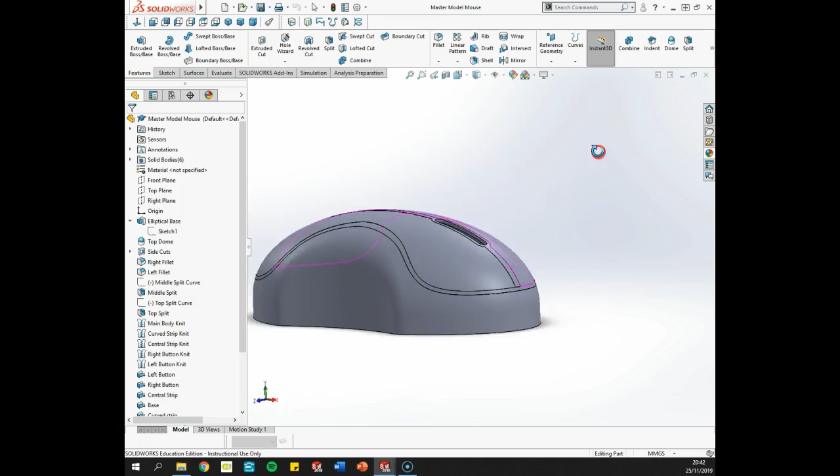So this is a solid body mouse. We use a bit of surfacing in it, which we'll get to later. One feature that I'm interested in here is using split lines or split curves to section it, to chop it up into sections, which is very, very handy.

And lastly, and probably most importantly, is the fact that we can create the whole model in one file here, including the wheel, which I haven't done here at the moment, everything in one file, and then we can export all the bodies, our solid bodies, out as individual part files. So you have to have a minimum of 5 for the project, and then you will reassemble them back together.

So the old way was to kind of do all the part files in individual files, which was a nightmare because you were going between files, getting sizes right, trying to get things to match up perfectly in terms of size or whatever. So this is a much better way of doing it.

So anyway, we'll go to the top plane. I'm going to draw an ellipse, center point on the origin, do a horizontal major axis, and then do your minor axis, and we'll set the following measurements there. And see, it's gone a bit wonky. I'm going to show you how to fix that.

In fact, what I'll do is straight away I'll take those 2 points there and I'll make them horizontally aligned, and then I'll do the major axis like so, make it 100, and the minor axis will make it 55, and it's fully defined. Exit the sketch, features, extruded boss base, and we'll do a 5mm thickness.

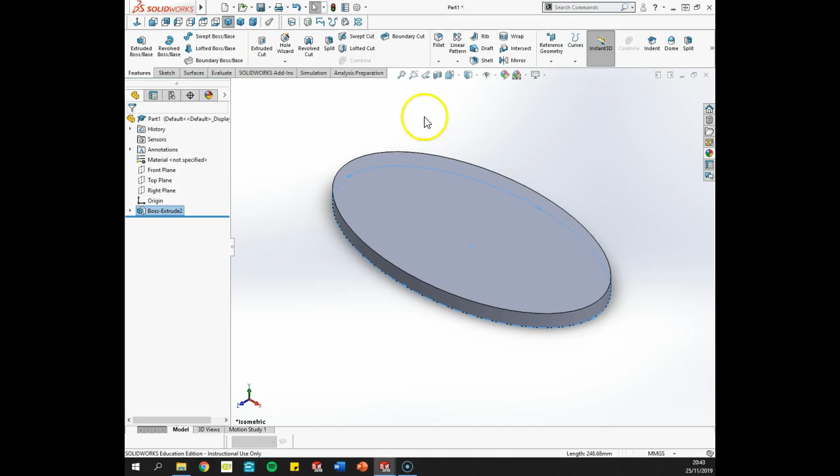Now, a new feature called dome. So we go to insert, features, and dome, and if we select the top surface there, it domes it. Make sure we have elliptical dome selected, it's a slightly better dome, and we go for a height of 25 and green tick. So elliptical dome, 25 high.

Now what we'll do is we'll do little cutouts on the side for the ergonomic finger grips, so top plane. And I'm going to do this in half and then mirror it over. Now I'm going to use a midpoint line here, which is not a construction line, but I can turn it to a construction line afterwards, so you can see the effect that the midpoint line has. Land your point on the circumference there, and select it and go for construction.

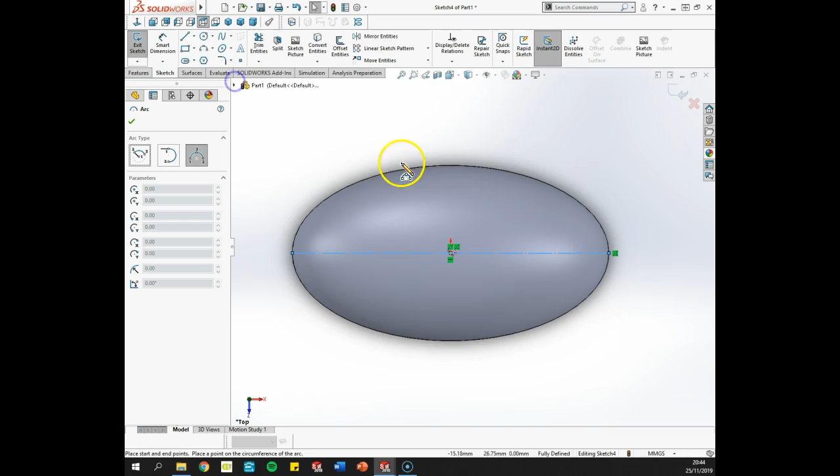Now I will do a 3-point arc, and I land my first point on the circumference, second point on the circumference, and the center point there. Now what I want to do here is put a smart dimension on it from this point to the origin, make it 25, and the same for the other one, and it should go fully defined or black. 25.

Maybe that center point there needs to be vertically aligned. Still hasn't quite gone black yet. Let me see what's going on here. What did I do wrong? Hold on, let me just delete that again. Get rid of them all, try that again. So 3-point arc. This worked for me flawlessly earlier.

Bit of curvature. Oh yeah, I was to do the radius, that's what I forgot. Sorry, I'll do the radius first. Radius 70. From there to there, 25. From there to there, 25 as well. And it should go fully black.

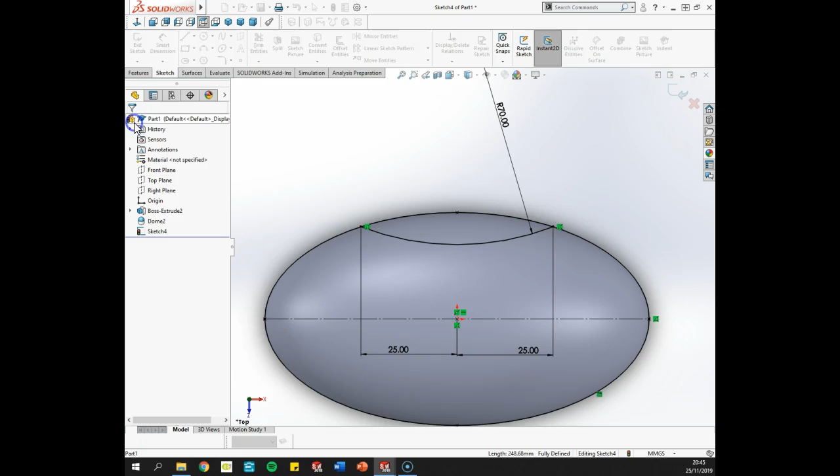Yep, there it is. Now I need to close off this curve because I'm going to use it as a cutout. So I'm going to go to convert entities, select the circumference of the ellipse, green tick, and trim entities, and trim off the bits we don't need, so you can barely see them disappearing there. And I'm left with that kind of shape there. And what I want to do then is mirror that. So just mirror that about the center line, green tick, and exit the sketch.

Now we're going to go features, extruded cut, select sketch 4. Now it's going the opposite way, so I want it to go up and I want it to go through all rather than a distance. So it'll cut through any material in its place. Right, there's the body. Now we should be renaming these. I'm not going to waste time by renaming these here, but rename them accordingly.

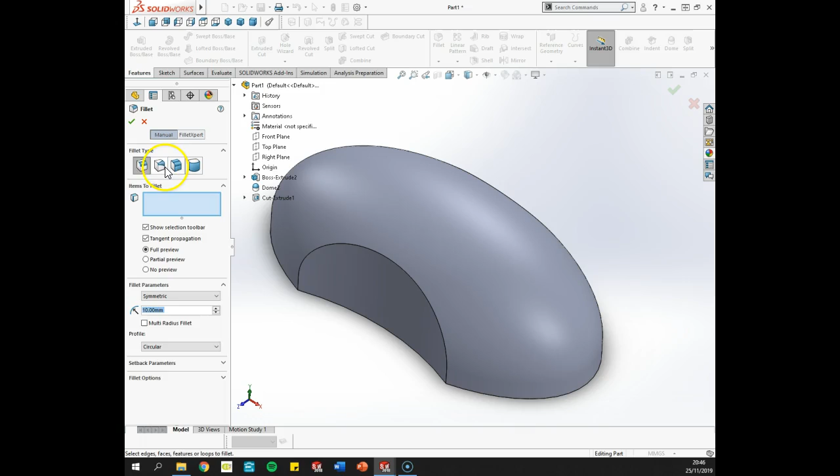We go to fillet, and we're going to introduce a new fillet here called a variable fillet, which means we can vary the fillet along a line. So I'm going to select the line, or curve in this case, and you can see that I have 3 extra pink dots. I have the start and end, so I have to activate all the dots first before I can use them.

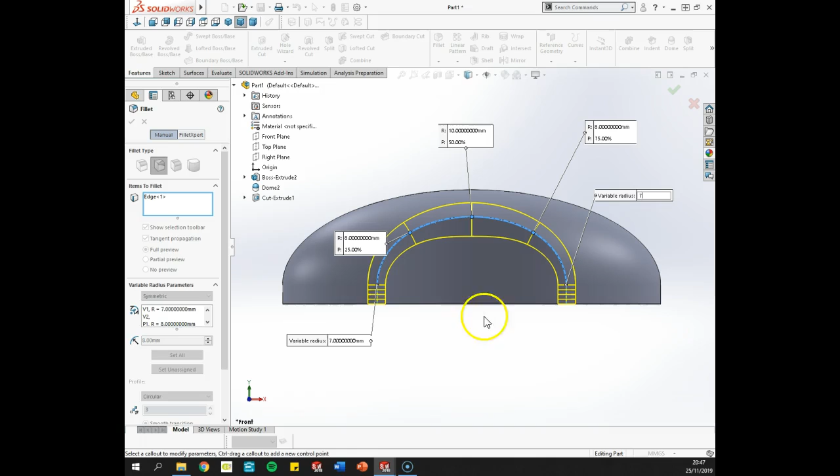And I'll just go to a front profile there. So this one here, I want this to be 7. The next one up, I want to be 8. I want it to peak at 10 in the middle. So you have to click into the box. This one here I want to be 8, so we're kind of being symmetric about it. Like so. So 7, 8, 10, 8, 7. That's grand. Green tick. And you can see there it's a much more ergonomic effect.

Now I have to do the same over the far side. I can't actually mirror that, but that's fine. Select the line, variable fillet, activate the pink dots. So our first one is 7. Next one is 8. Middle one is 10. 8. And 7. Green tick. And that's that there.

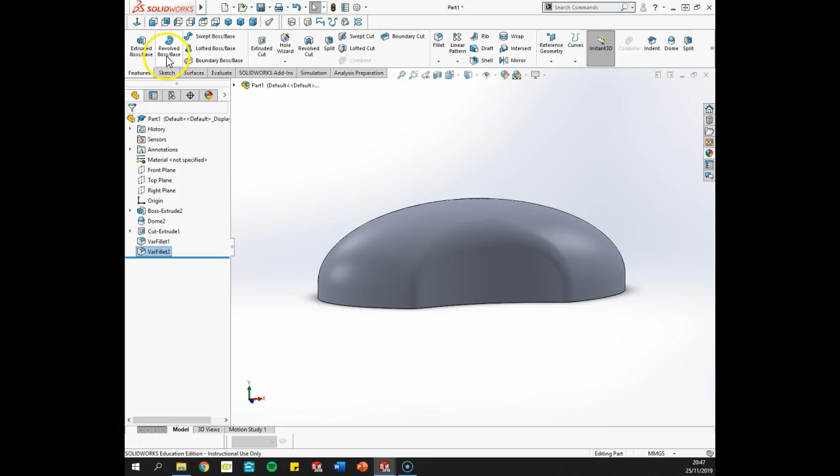Okay, the next thing that I want to do, if I just go back to my model, so after that's the fillet. Yeah, so we're going to do the split curve now. So we're going to split it kind of across the middle. So I'll go to a front view, I'll select the front plane. Once again, I'm going to do a mirror. I'm going to mirror a curve from one side to the other, so I need a center line or axis of symmetry for that. Make sure that that line is vertical. Doesn't look vertical, it is vertical.

Okay, so I'm going to start off with a spline. Now I want to clear the top of the fillets here. So what I'm going to do here is go to view, display, and I don't want tangent edges removed. I want them visible so I can kind of see what I have to work with there. Now my first point, I'm just going to start here. First point, second point, and my third point will be on the axis of symmetry just above that tangent line.

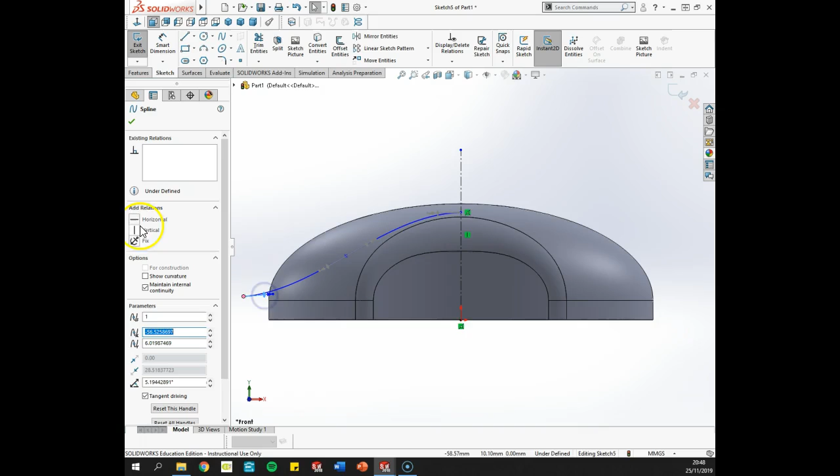Okay, now this one here, grab the spline handle, make it horizontal. I have to give it another move again, horizontal. This one here, because it's on an axis of symmetry, I want it to transition over perfectly, so we want to make it horizontal, so it goes perpendicular in effect to the line of symmetry there. And do I need to mess around with this anymore? So you're just going to approximate. I'm not going to put any measurements on this. We'll just kind of go with that.

Now what I'll do is offset entities. So offset basically means I can create the same profile but at a distance away. So that's the profile. There it is down there. I'm going to reverse it and I'm going to go 1.5 mil. And I typed something wrong there. 1.5. There we go. Maybe I'll go with 1 mil so I can go back and change that. Just brings it a little bit closer.

Okay. Then what I'll do is mirror those two. Mirror it about my center line like so. Green tick. Now I would go back at the end and I would fully define them once the model is completed and I'm happy with everything. Right, so the next thing we'll do is we're going to use that curve, those two curves in effect, to split the whole thing in the middle into 3 parts.

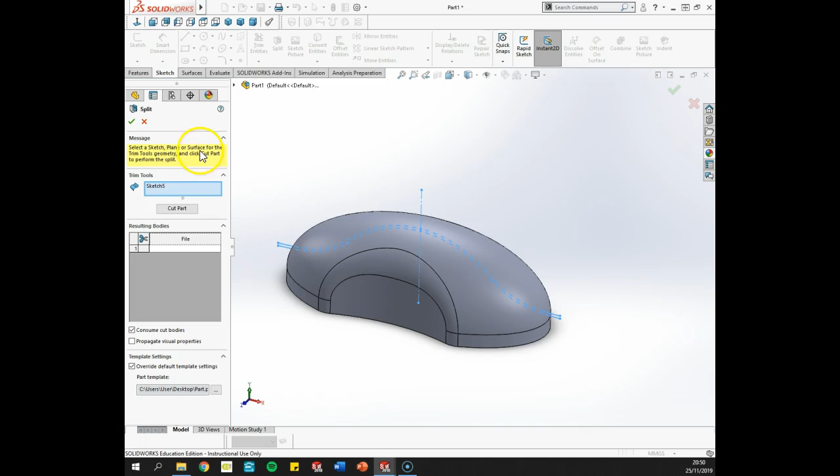So we go insert, features, and we go to split. Now the curve is already selected as you can see, so there we are, sketch 5. And we want to cut the part, and it should leave 3 resulting parts. A top part, that little skinny part there, and the bottom part. Okay, select all 3 of them. Do not go consume cut bodies, that consume makes them disappear, so untick that, and green tick.

In my solid bodies folder now I have 3 bodies. I have the top part, that skinny wavy curvy part, and then the kind of base. Okay, so it's split. Now I'm going to hide that sketch. I don't need to see it anymore. We're done with that. I'll go to the top plane now. So we're going to do a cut or a split for the cavity for the mouse wheel to go into.

So top plane, I'll go with the midpoint line again. Make it as long as you want, doesn't matter. I'm going to turn it to a construction line though, which is very important. Now we'll use a new feature called a slot. A slot is basically 2 semicircles at one end with a straight part in the middle. So I'll select the first one.

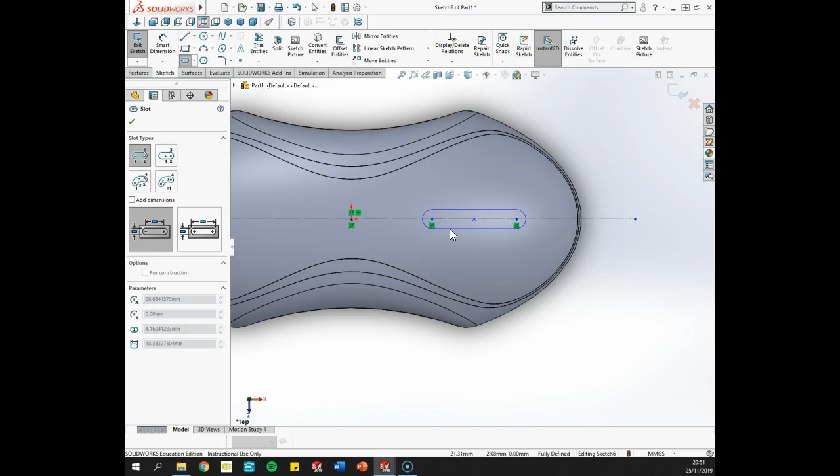And I'll have to turn it off. And we land our first semicircle center there, second semicircle there. And we draw it like so.

And we need to put some measurements on it. So I think the radius of that is 1.5. I think the distance from the origin to that one is 19. And then the distance from the origin to the far center point was 35.

Like so. Now what I need to do is create a kind of a straight bit. So I'm going to, and it doesn't matter if I'm outside the sketch here or outside the model. So just one big long horizontal line like so. Need to make sure it's horizontal, and I'm going to mirror that down.

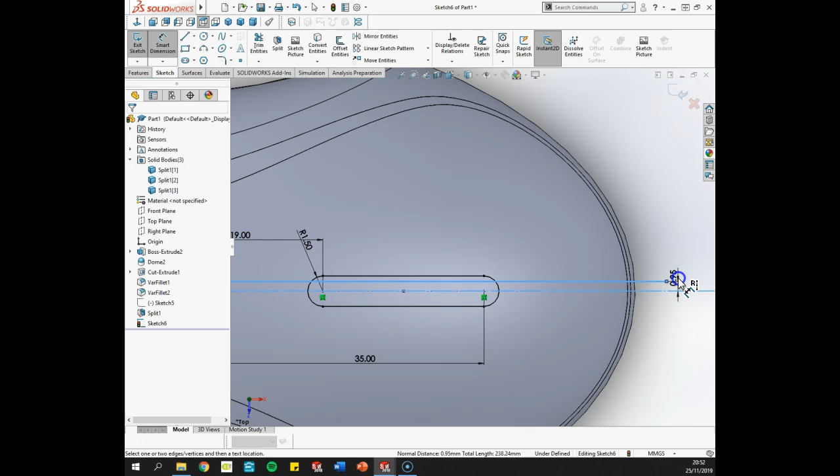No, I'll put a smart dimension on it first. So that center line, make it 1, and I will mirror that about the center line like so.

We're going to be doing a bit of trimming now in a minute, but just hold your horses for a second. Now what we'll do is we'll offset that slot there. So offset entities at a distance of, oh god, what was it? I think it was 1, like so.

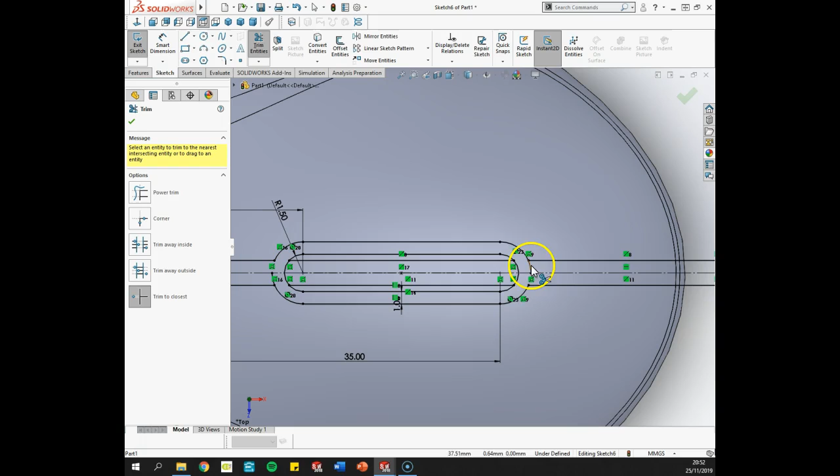Now I need to do a bit of trimming here, so bear with me. Trim entities, so we need to get rid of that there, that there, that there, there, even this little point part in here. It'll all make sense at the end. That bit in there, that bit in there.

Like so. And as I said before, it doesn't matter that the sketch kind of goes outside the model. You'll see why in a minute.

So we could put a bit of work into making it fully defined. So one thing I can do there, if I can not click the 1, that'd be great. Hold that and that point and make them vertical.

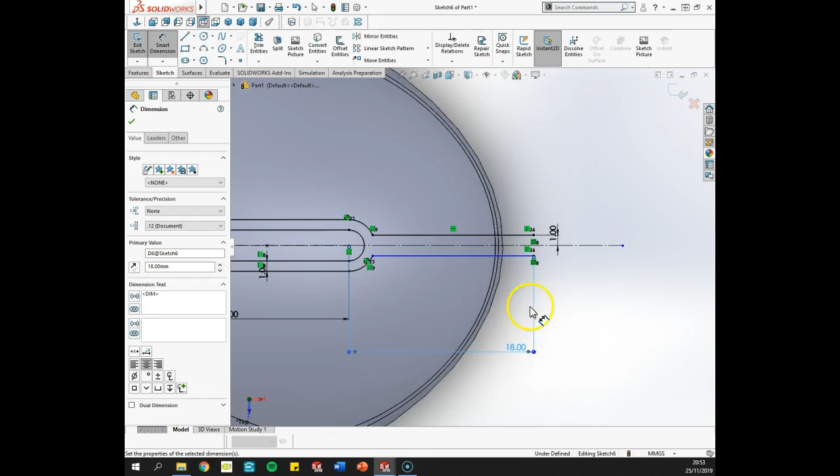If you wanted to put a dimension on it to satisfy yourself, you could just do that there. We'll just make it 18. Make that 16. We have to make sure that that's horizontal.

Okay, so it's got a problem there, so I mightn't push my luck. I'll just leave that as it is. It's probably no harm to just leave it like that. That's the kind of profile I want, so we'll just go with them dimensions for now.

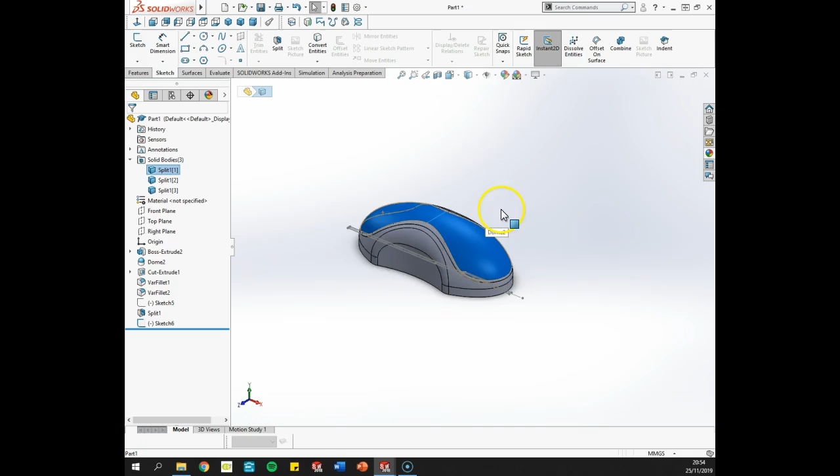So end my sketch. Now I'm going to use the split again, so it's going to split it from the top down, but I'm not going to split it through that body there, which would be that and that one there. I'm actually just going to select that one, so it's just going to split the top one, which is handy, so I can isolate that top section to be split, which is really what's going on with the mouse, the cavity for the wheel anyway.

So we go insert features split, and I'll select the sketch, selected bodies now, and I'm going to select the top. I couldn't do that last time because I only had, with my first split, I only had 1 body, so I had no choice but to select 1. Okay, but because this is 3 bodies now, I have the option of selecting bodies.

So we want to go cut, and we get 4 resulting parts. Select them, consume cut bodies. So let's have a look at our 4 parts. The left button, the right button, this bit down the center, and we have this thing here.

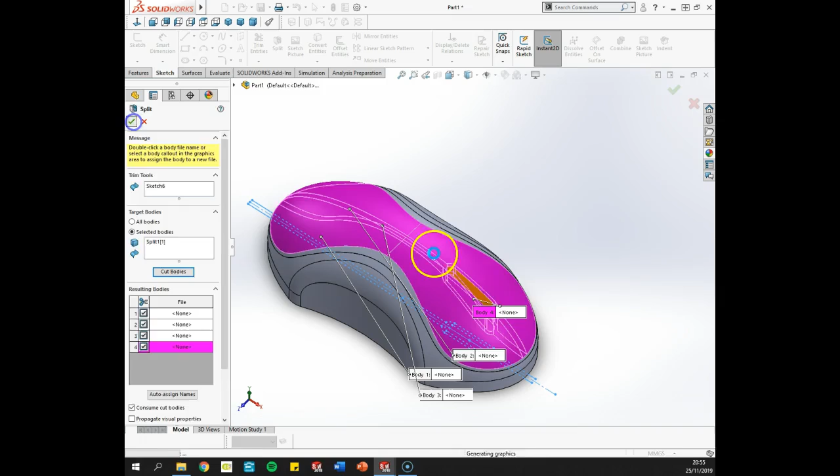Now this one we're going to be getting rid of later. We're going to delete that because that has to go. You'll see that there's solid material there left behind. Now I probably didn't untick consume cut bodies there, that's why they disappeared. Yeah, look at that.

There we are. Now we've got more bodies in our folder. I'm looking for that one there, and I'm going to right click on it and go delete keep body. Delete. Now that's gone, and that comes up as a move in your design tree.

Okay, so let's just kind of review what we have there. We have this kind of central strip there. If I right click it and go isolate, that's what it looks like. This is going to be important.

We're going to keep this one for later because we're going to be able to drill a hole there for the axle for the mouse wheel. It's going to be handy.

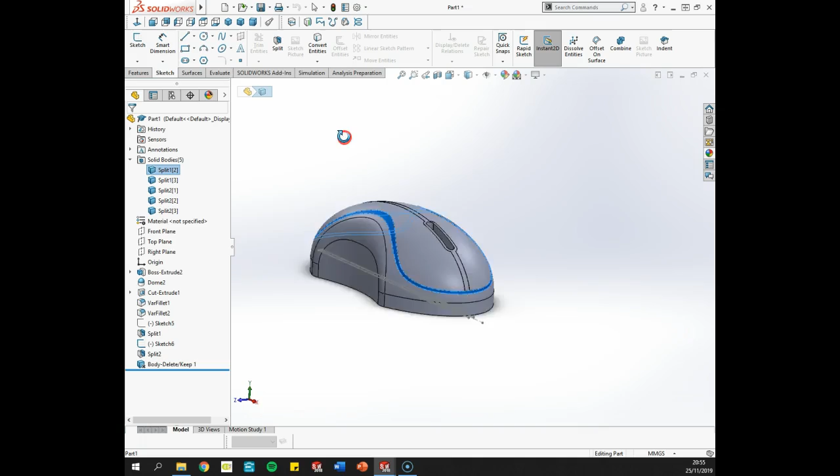Okay, so that's important. Our next ones are the left mouse button, right mouse button, the base, and this one here, which I'll isolate to show you what we're left with. Remember, the curve cut through the object earlier on, so it's split, and this is what we were left with. We're not actually going to be using this. In fact, we're going to be using none of these here. This will be none of the final mouse except for this part here.

This is going to be underneath. We're going to be adding layers onto it, so think about this like a skeleton, and what we're going to do is add the flesh onto it. So this is our skeleton, and none of these will be used. It's just what's underneath all the plastic we're going to create.

So we're going to use some surfaces now. Make sure your surfaces toolbar is open. If it's not, right click and make sure surfaces is ticked. What we're going to do is knit all the main surfaces. They look like surfaces at the moment, but they're not, they're faces. Faces and surfaces are different. So I'm going to knit that one.

Green tick, knit the other one, green tick. Sorry, I have two, just make sure you don't have two things there. It took the last surface knit and tried to knit it again, I don't know why it does that, it's like a default thing. Green tick, that middle thing. Look, it's doing it again. Just delete that one there and select the one that's appropriate.

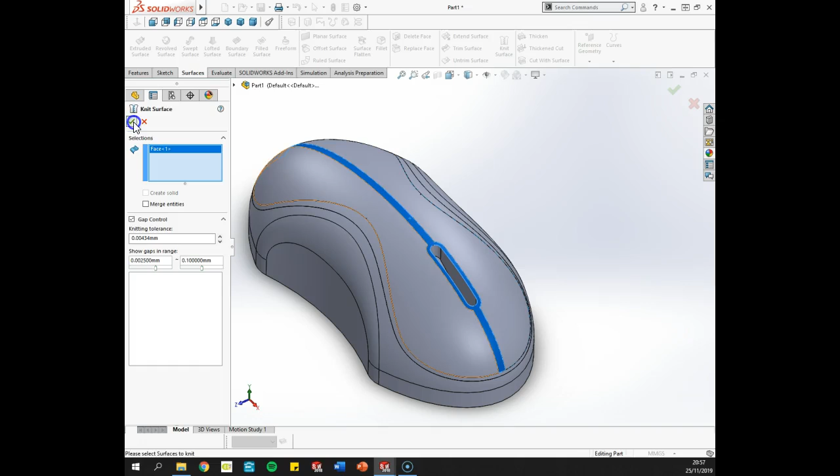Now the last one we're going to do, sorry, this one here as well, this curvy thing. And now the last one we're going to do is the base. So now what we need to do is select multiple faces here, hold control on the keyboard and go around and select all these other ones. We're going to combine all these together and the one underneath to make one surface.

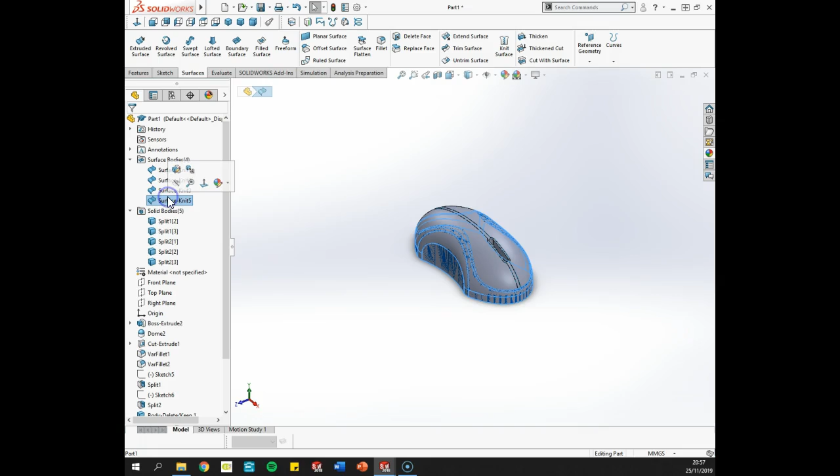Okay, so now I have a surface bodies folder and you can see all the surfaces there. It doesn't look as if much has changed, but it actually has. So the central strip, left button, right button, base, and I thought maybe I included that one there.

So my surface knit, I think I selected an extra one by accident. Or did I? Yeah, I think I selected that one there by accident in the last one, because it was in the box. When I clicked knit surface, it was already in there, I didn't delete it. Right, grand.

Now what we're going to do with all of them is thicken them. So thicken, now I want to thicken it outwards in that direction, not inwards, 1 millimeter, do not merge result for any of these. Thicken, the other button, unmerge, 1 millimeter.

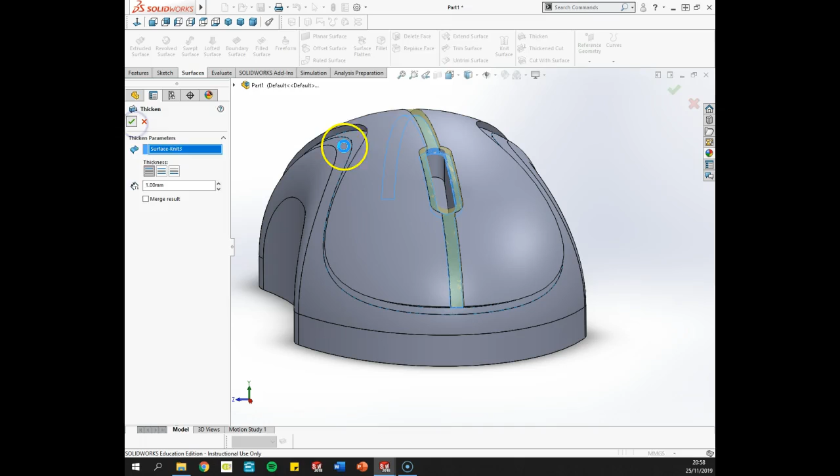That one done, so look what's happening there, we're adding thickness to it. So these are the actual bits that we're going to use, these thickened parts, not the parts underneath it. Click that one there, unmerge. Now the weird curvy part, which is there. And now the base, unmerge.

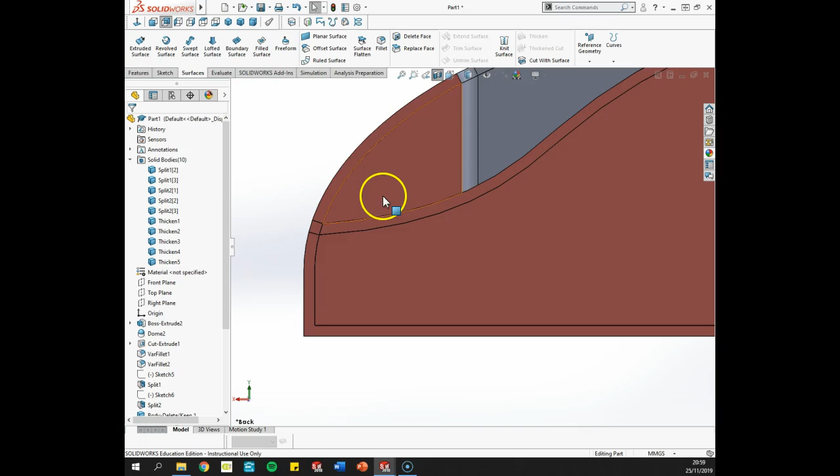Right, so it doesn't look as if much has changed, but it actually has. I'm going to go to a section view here, and use that plane there. Let's just look at it. You can see this is what I've added on, this is the skeleton underneath. This is what I've added on, this was the skeleton underneath. That's what I added on, skeleton underneath, that's what I added on. Okay, so we've just added thickness to everything.

So what I can do here now is I'm pretty much finished with the skeleton, so I can delete the parts I don't need. This is very important as well, I'm going to rename everything. So I'll call this base thicken, and this will update in the solid bodies folder, as you can see there. This is critically important because it's going to give the file names to your parts. I'm just going to call this curve thicken.

This one I'll call center strip or central strip thicken, and that's my left button thicken, and right button thicken, right button thicken.

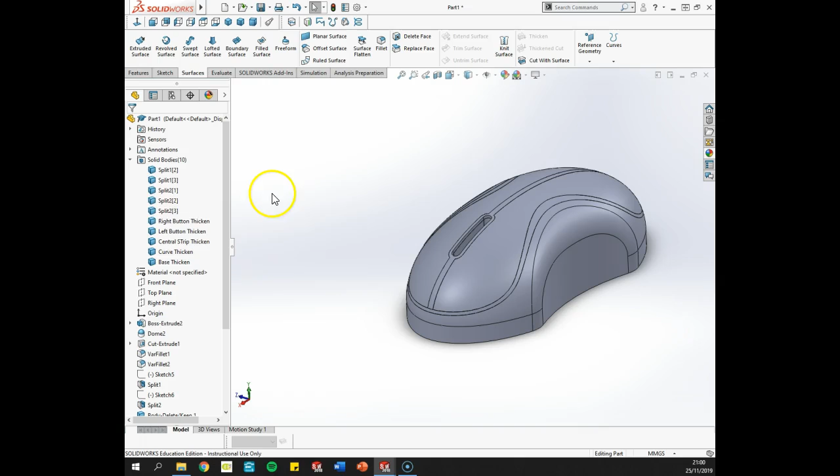And they're all renamed there. Now, there was one part that we needed, and that's this yoke here, this thing here. We'll call this the wheel mount.

So the ones that are named properly there, they're all our parts that we're going to need. I'm going to delete all these ones, I don't need them anymore. Do you have to delete them? No, you don't have to delete them, I just want to be tidy about things. I don't need them anymore, so get rid of them. Delete. And one more. Delete.

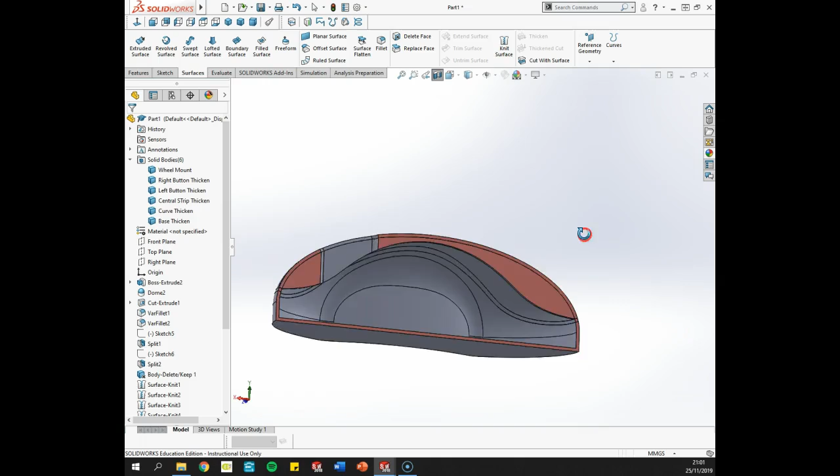So this is the skeleton gone. Now, let's go back to that section view and see what's left. So now you can see that it's hollow. I've gotten rid of the skeleton underneath. It's hollow, it's more realistic of a mouse. Components can fit in here, etc.

Grand. Now our next move would be to, so we could probably do the wheel in here. We might as well, so we'll do the wheel. What I need to do is turn this to hidden detail visible.

Like so. What I want to do, in fact, that wheel mount, I'm going to isolate that. And what I want to do is drill a hole in here somewhere.

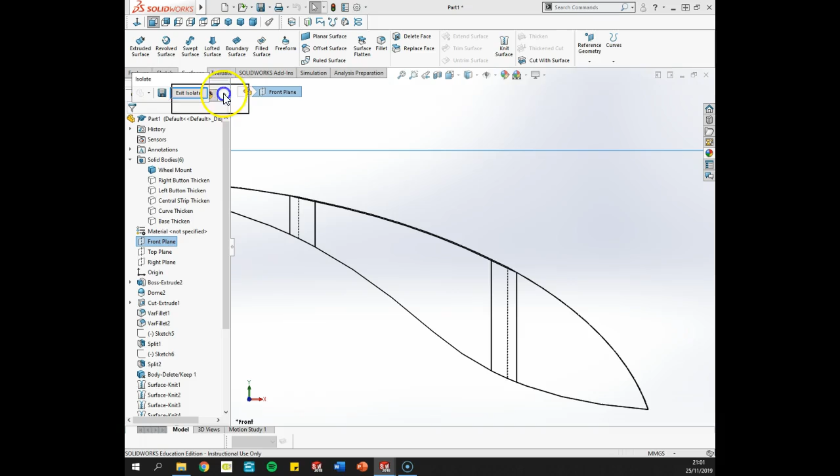So I'm going to select the front plane, get rid of that there, sketch. I'm going to do a center line from the middle there to the middle there, and I'm going to do a circle on the midpoint of that line, and make it diameter 1.5. Okay, so that looks fairly central there.

Now what I'll do is I will extrude cut that, not extrude it, that's different - I will extrude cut that. And I will do it bidirectional, that means midplane. Like so. So we've now drilled a hole for the axle.

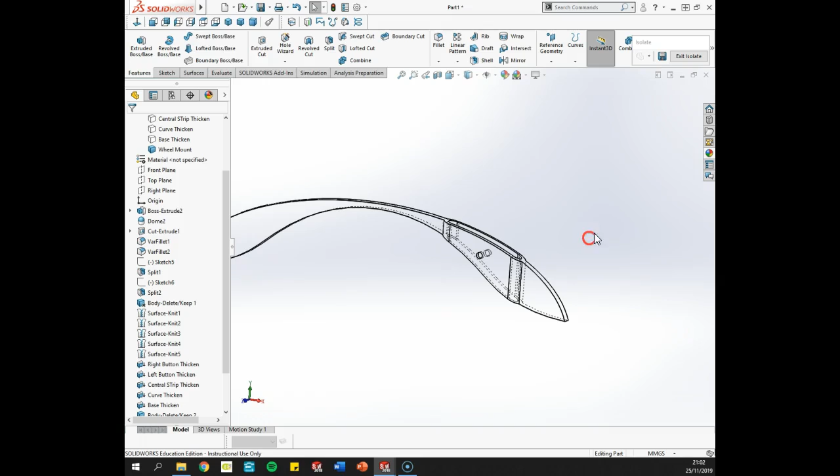Next thing I will do is create the axle itself. So I'll go circle, we need to get the front plane here. I'll just start that again. Front plane, circle, and we're going to locate that center point, and do it the exact same size as that one there. Okay.

And what I want to do here is a boss extrude of the sketch, and we want to go midplane. Just let me think about this one now. Actually, we're going to use two directions here because I wanted to come up and be flush with this outer surface here.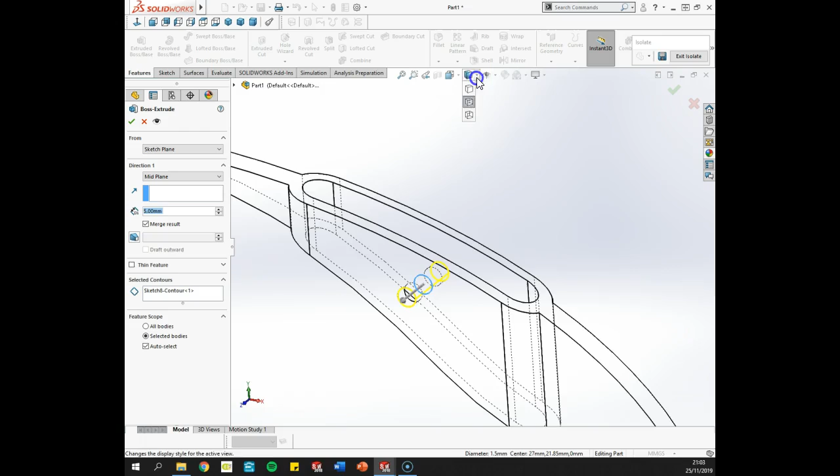So I'm just going to go back into this view here. So we won't go midplane, we'll go up the surface. I'll select that surface, but I want to go in direction 2, tick the box up the surface. Like so, so it'll always meet those two surfaces, no matter how far apart them surfaces are. Green tick, there's our axle.

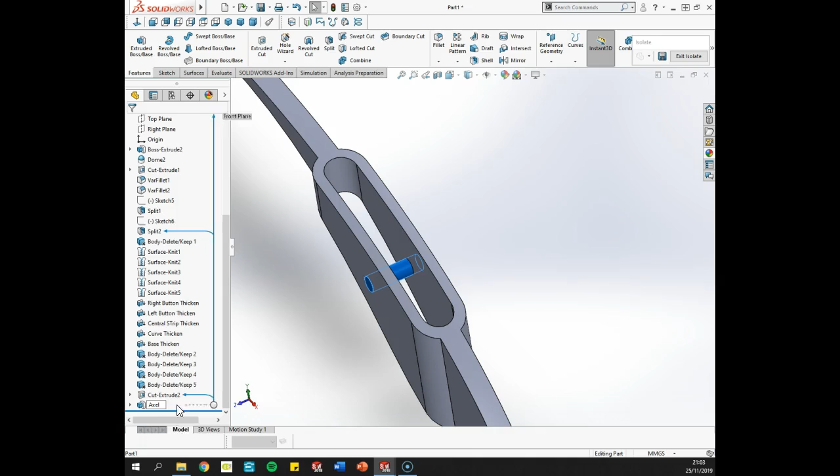Now one problem, I merged result - I want this to be a part. So, unmerge result. Now you can see that this is a part in the solid bodies folder, and I'm going to call that axle. I think that's how you spell axle, or is it L-E? Oh, I don't know, whatever. So now that's in my solid bodies folder.

Lastly, I'm going to create the wheel. So front view again, I'll go back to the hidden detail visible. So we're going to sketch a circle. Once again, I forgot to select the front plane. Circle, okay, the center point.

Now this is handy because I can approximate - I can see how much clearance I have. I'll probably go as far as there. And I'll make this 15.5. Like so, so that's the circle there.

And what I want to do is extrude that now. Why can't I see that circle? Because I'm in hidden detail visible. Where am I? Okay, so I'm going to extrude boss base.

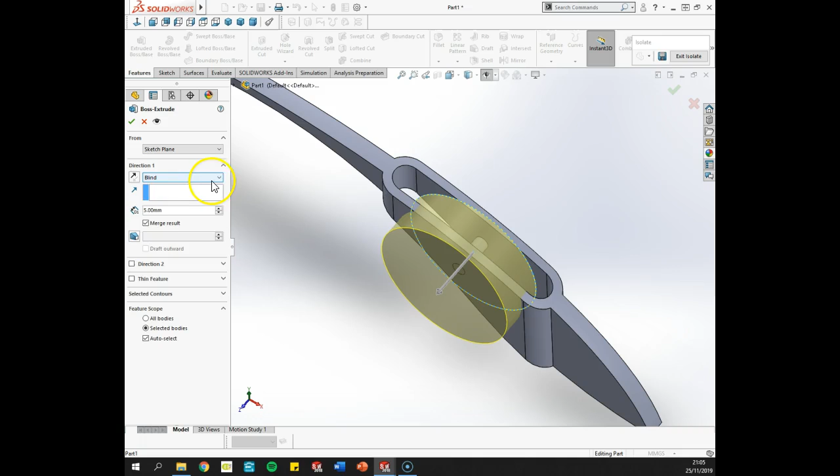We're going to do something similar again, we're going to go up the surface, so I'm going to get it flush with that surface there. Open up and unmerge result as well. Direction 2, up the surface, so it goes up to it but doesn't go over it. Green tick. So now there's my mouse wheel.

I'm going to put a fillet on that and make it look a bit more real. So we'll go fully round fillet, which is the last one. Select the first one, right click, select second one, right click, and then the third one, right click.

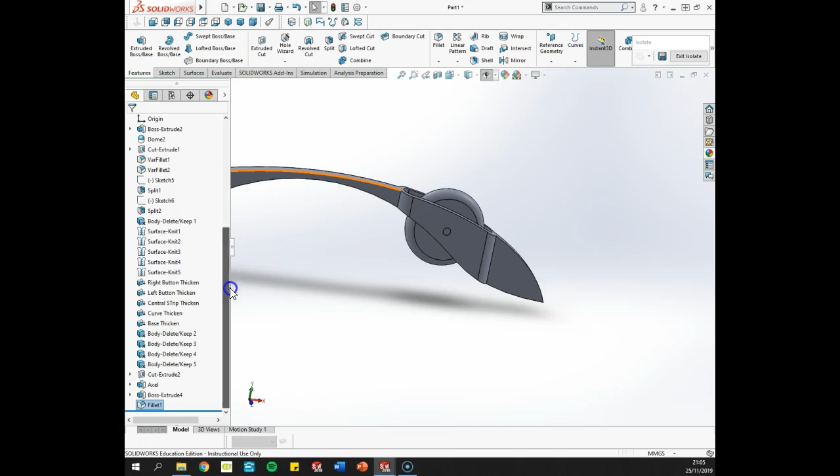Okay, so there's a mouse wheel. Last thing I'll do, I'll just make sure that that's a solid body in itself. Yeah, it's called fillet 1 because the fillet was the last thing that I done to that body. I won't call it mouse wheel yet because I'm going to make one more change to it. Right, let's go to front plane.

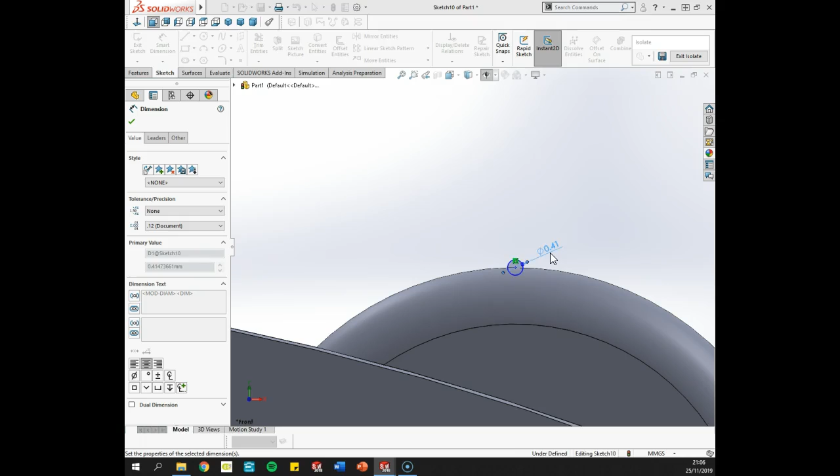Look normal to it, sketch, and what I want to do is a wee circle just up here at the very top, and it's going to be a tiny circle, and I hope I get this right now. Do I put a dimension on it? Yeah, sure, why not? So 0.25. So this is going to represent the grip, the ergonomic grip that you might have on a mouse. We can always go back and change it.

I don't know why it keeps disappearing. I think it's because of that there. Yeah, there we are. We're going to cut that out. Yeah, I'll cut it first. So extruded cut, select it, and we need to go mid plane, like so, so you can see the grip there. Now how could I make it deeper? I could go back and change the diameter of it to make it deeper. I'll just go with that for now.

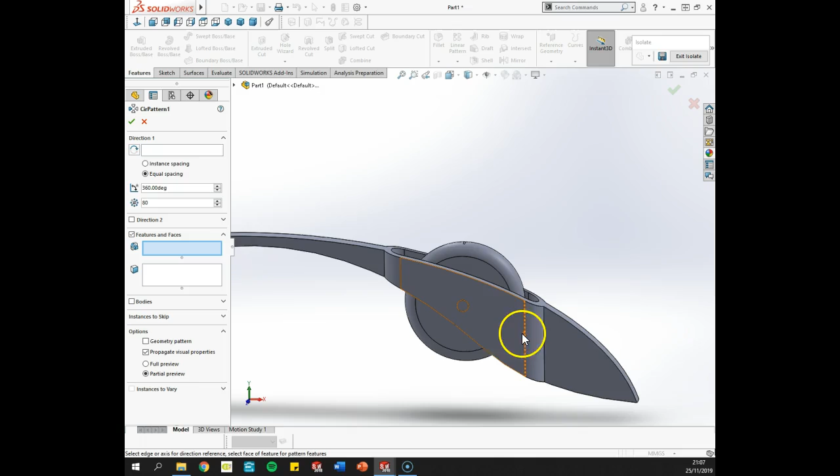So obviously I don't have to do that a load of times, so we can use our circular pattern. Now I think for circular pattern we might need to have an axis turned on, so we go in here and view temporary axis, so you can see there's one in the center there. Circular pattern. The object we want the circular pattern is, I'm going to go to the pull down menu, it's this little cut extrude here. This one here is the pattern axis. That's that one there. You can see what's happening. That's great, exactly what I want.

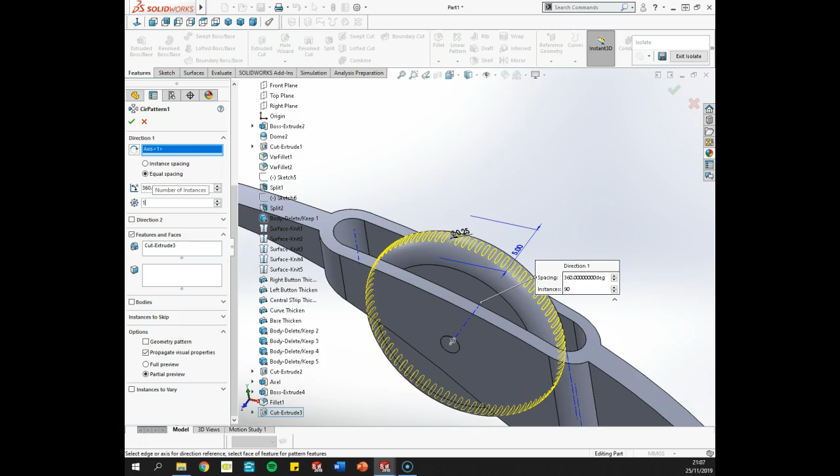Now this tells me it does it in a 360-degree rotation, equal spacing, and there's 80 of them. Let's increase it to 90 and see what happens. Sure, let's push the boat out. Let's go to 100. Live a little. Let's go to 120. Brilliant. Right, green tick. This could take a while to process because it has to do a lot of them, and no, that's fine. We'll go with that.

So I'll turn off my temporary axis, and I will rename this here. Sorry, no, the body itself, circular pattern, I'll rename it up here. We'll just call this wheel. Now I'm going to exit isolate. There's the whole mouse done there. We've more than 5 parts. We have the wheel, we have the axle, we have the wheel mount, we have the base, we have the curved strip, we have a central strip. We have a left button, we have a right button.

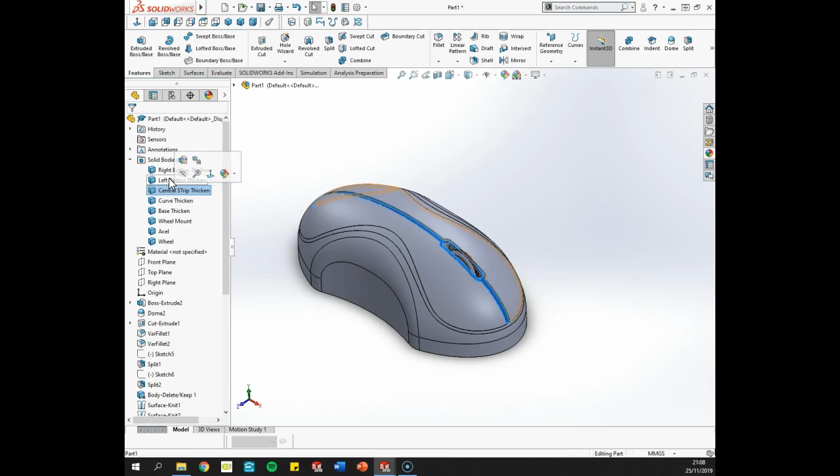Okay. Now I'm going to give this a save. I'm going to call this mouse master model. So it's the master, the skeleton if you like. On my desktop, on my second screen, I'm creating a folder. We'll just call it master model mouse. And I'm actually going to save my mouse into that. That's probably the best thing to do. So just go to the desktop, master model mouse, open, and save. Okay, so that's important that you keep all your files into one folder.

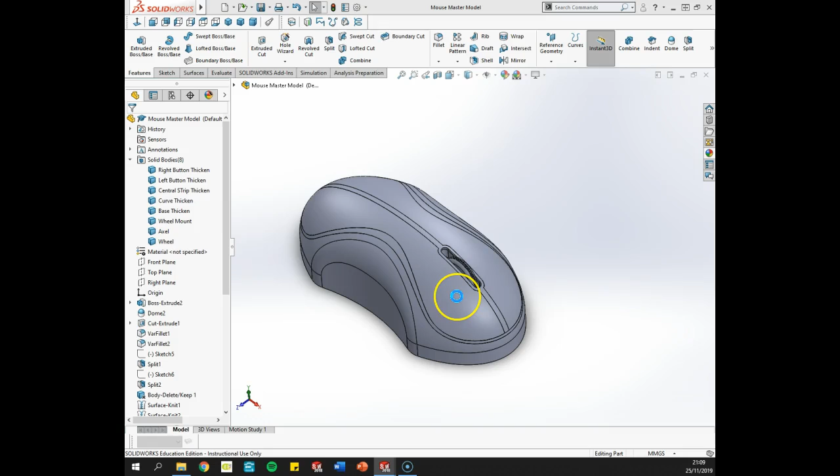Actually, that's my other one. Sorry, I'm after saving the wrong one, I think. File, save as, because I have 2 of them open. Desktop, master model mouse. Oh, that's fine. Now, I'm going to close the other one because that's going to annoy me. Get rid of that. Isometric view, grand. So we're not going to do any more to this here. We're going to send out all the parts now.

This is so important. So when you're happy with all your parts that they're done, we can go to Insert, Features, Save Bodies. This creates individual part files. Whatever you have your bodies named as here, that's what their file names are going to be. So it's important that you get all them named correctly before you do this. So Insert, Features, Save Bodies.

Now I'm going to select them all, so auto assign names. See the way it gives it all the part names there. Do not consume cut bodies. And as far as I remember, that's it. So we have all our 8 bodies there, so just green tick.

Now where it's going to save these is the same folder as the master model was saved in. So the folder that I created, you should see things flashing up on the screen. It's probably going to give me a message here now in a second.

It's going to be really loud in my earphones. Or is it? Sometimes it does.

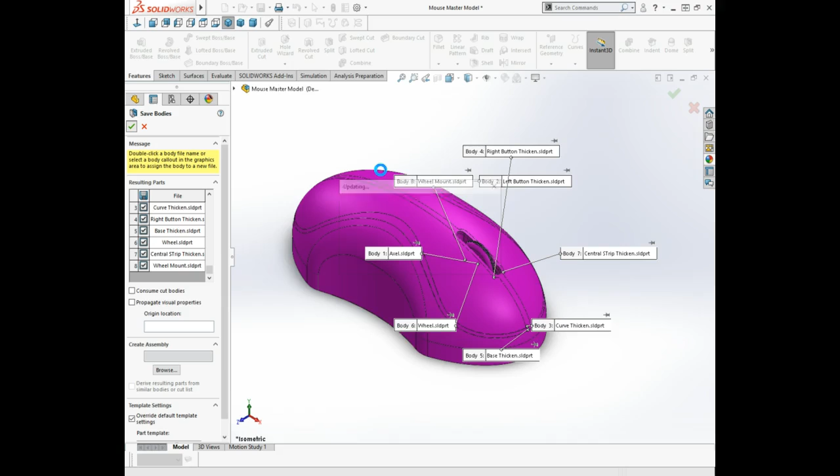If it does, just click yes. Right, so I'm going to minimize that. Go to my folder, master model mouse, there they all are. Great. Now, I'm going to close that because I'm finished with it. Save. And it's important that you put that into your folder.

Now what I'm going to do is open the files individually, have a look at them, and add their materials. Go to base. I'm going to add their materials onto it. I'm not going to spend a lot of time doing this. It's advised as well that if you're doing this method, the master model method, that you make some sort of a change to it, not including the materials. So I'm just going to make this high gloss plastic. Drag it on and make sure it goes on to the whole thing.

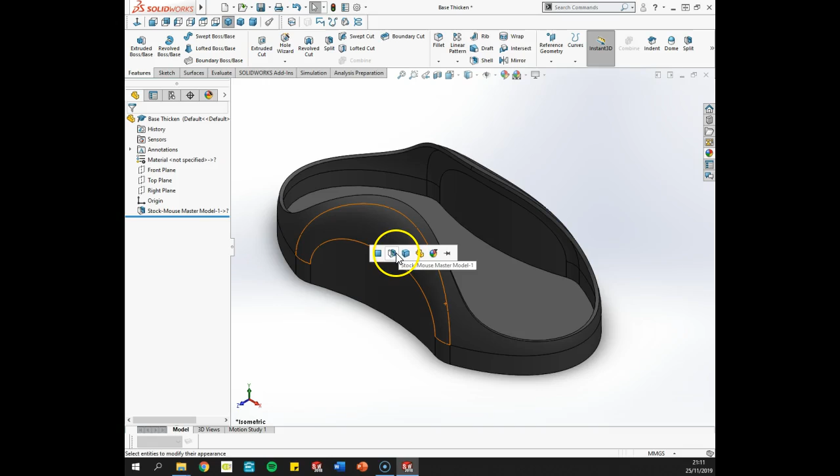What I'll do here as well, for the ergonomic grip, I'm going to make it textured rubber. So rubber, textured, textured rubber. Now what I'm going to do is drag it on here, but I want it just to go onto the face. And I can copy that now. If I click on it, go to copy appearance. Now I'm holding control on the keyboard. Hold control, that one there, there, there, there. It's just another way of doing it quickly. Right click and go to paste appearance.

Now I want that to be yellow. I'm going to make it yellow. So I'm going into my display manager here from my materials, textured rubber, right click on it, edit, and now we can select a color for it. Like so. Now what I'll do as well, I'm going to put a logo on it. Actually, I'm going to put a fillet on the bottom as well.

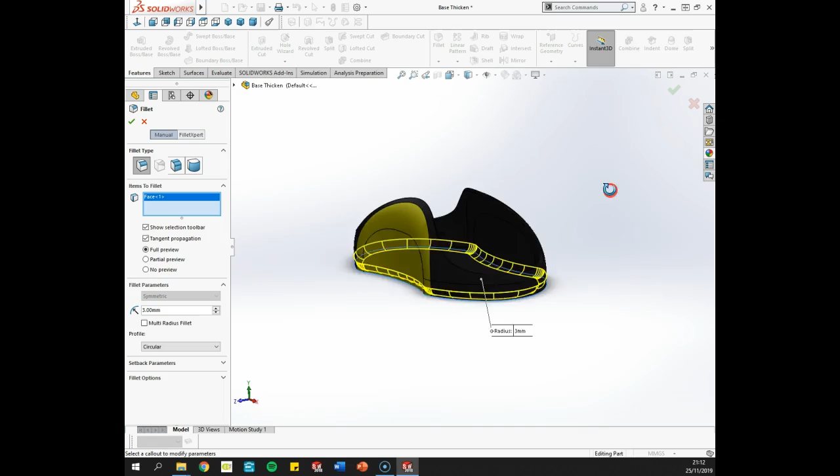Okay, so fillet, a regular fillet on the bottom. I'm not going to make it 10. That's too much. Let's try 5, maybe even 3. No, we'll go with 3. It's struggling here. We'll go with 3. Now, depending on the severity of the radius, we might have to do the inside as well, just to be safe. So I'm going to fillet that there as well.

Could I have done that in the same fillet? Let's have a look. So if I go back to my fillet, edit feature, can I select the inside one as well? Yeah, I can. So I'm doing the 2 of them. Grand.

What I might do now as well is put, I have a Logitech logo. I'm just going to copy that, a decal, copy that into my master model mouse on my desktop. So this is my decal. So I'm going to go to a front view, in here to my decals, add decal, find that folder, browse, desktop, master model mouse, Logitech logo, open.

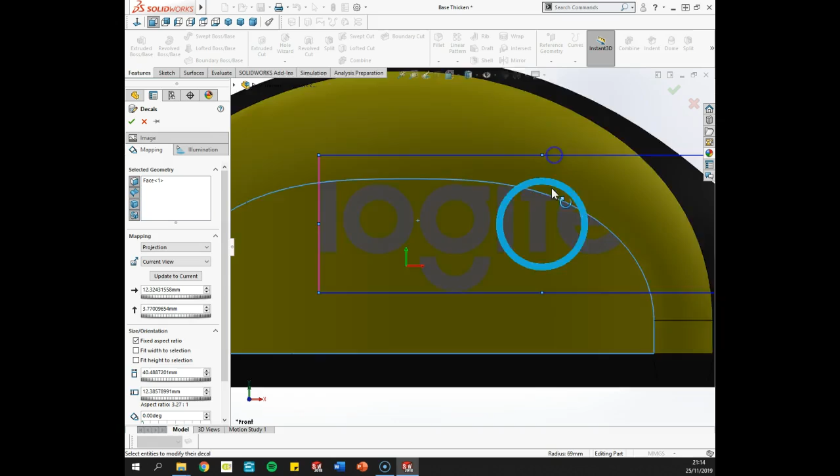I'm going to click this one here, use alpha decal channel, mapping, and we want to go to current view. It's after reorientating itself. That's great. And we'll go to projection. What I need to do is make it bigger. Now you see it's not actually going onto that surface there, so if I go in here to select the geometry face, I'll select that face as well. That's grand. Okay, I'll do the same on the far side.

So add decal. Not sure there's a way that we can copy decals over, so I'm just going to do it manually. Master model mouse, Logitech logo. Just going to drag that over there. Alpha decal channel, mapping, current view, select another face. And we don't want to rotate it. Come on, there we are.

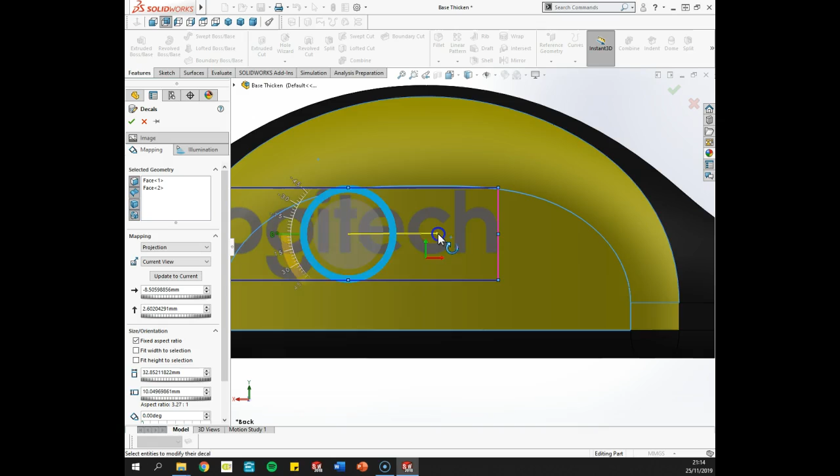So if you want to get it accurate like the other side, you need to be looking at things like the measurements here to get it bang on. And I'm after messing with the rotation again. Right, green tick. Yeah, looks good enough. Right, so that's our base thicken.

So I'll just save that there. Close that down. I'm not going to do any more with it. Let's see, master model. So we'll go with the next one up, which was the curve thicken. I'm going to make this a different color here now.

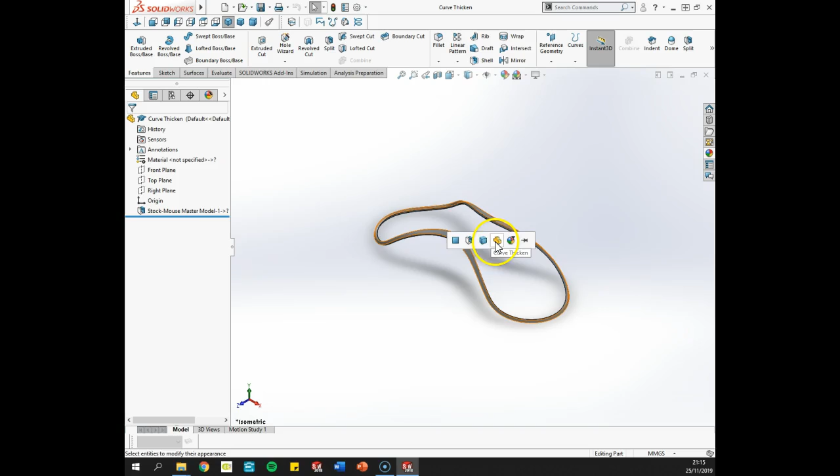I'm going to make this, let's go chrome, metal, chromium plate, drag it on. So just go to the whole body. Now I'm not going to do any more to this. I don't want to put fillets on it or do anything, so we'll just leave this one as it is. It's a simple part. Next one will be the central strip.

I'll make this black high gloss plastic. Plastic, high gloss. Add it to the whole body. Now I'm going to add some fillets in here. Little small fillets. Maybe here. 10 is way too much, so let's just go with 1 for a second, see what it looks like. That's too much. 0.25. Just a little subtle fillet there. Maybe 0.5. There we are. Okay.

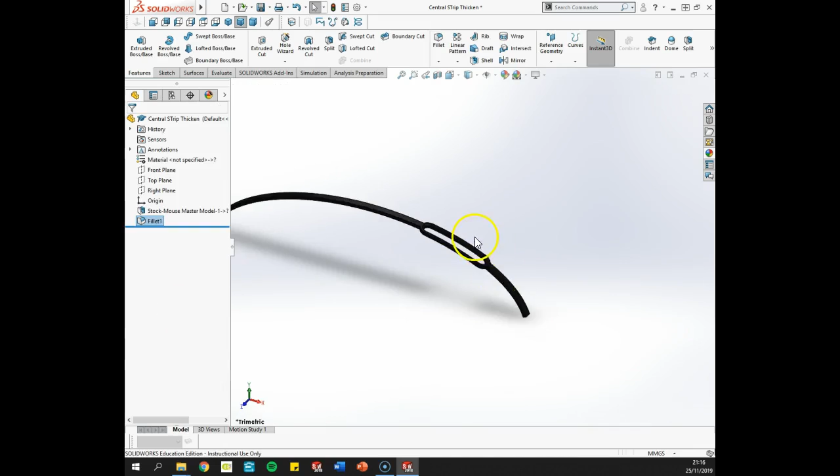Quick save. Grand. Next one will be the mouse buttons. Right button. What color will I go with now? Let's just go with white, high gloss plastic. I don't know how this is going to look at the end, and once again I'm going to put a fillet in here. 0.5. Like so. Save, and do the same with the left button.

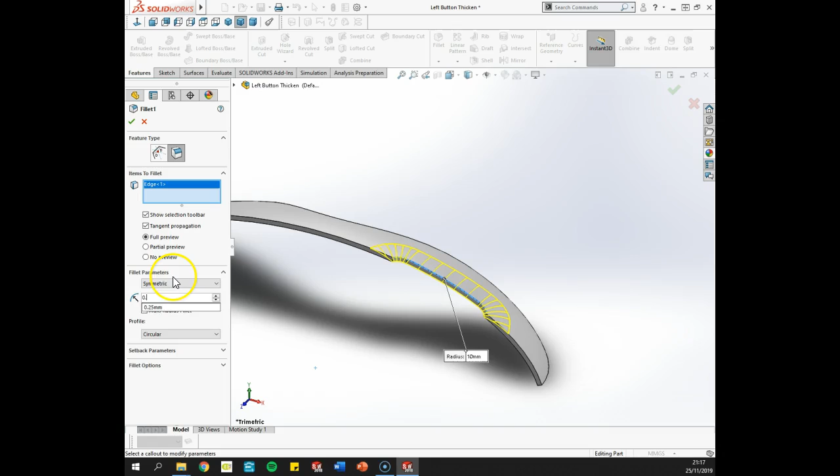Fillet 0.25. No, we don't want 10. It's too much. We jumped the gun there a bit. Although 10, if you wanted to have a real curvy mouse, yeah, you could probably do that. 0.5. Grand. Save that. Close it.

And finally, I'll do that wheel mount. Now the wheel mount's going to be hidden. All I'm going to do with that is, where is the wheel mount? There it is. I have to do the wheel as well, actually. Wheel mount. Just make it black high gloss plastic. Doesn't really matter because it's going to be hidden. We might have to add fillets onto that later.

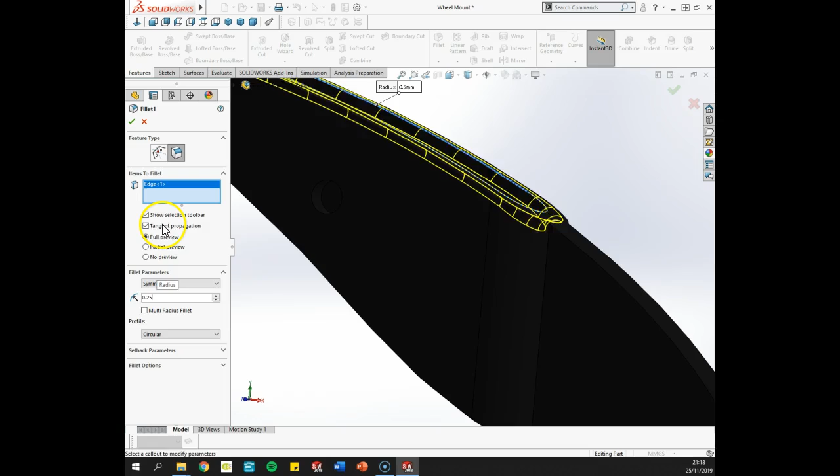Let's just try a fillet here actually. 0.5. Just go around the rim there like so. Maybe 0.25. Mightn't even make a difference, mightn't even be seen that much.

Grand. Save that part. And we need to go for the wheel now and the axle, so I'm just going to make this some sort of rubber, matte rubber, whole body. I'm not going to do any more to that.

Actually, you know what, I forgot about this, the hole in the center. So select it on that face there, pick up the whole center. Now if memory serves me correctly, the diameter was 1.5, like so, and I'll do an extruded cut through all. Grand.

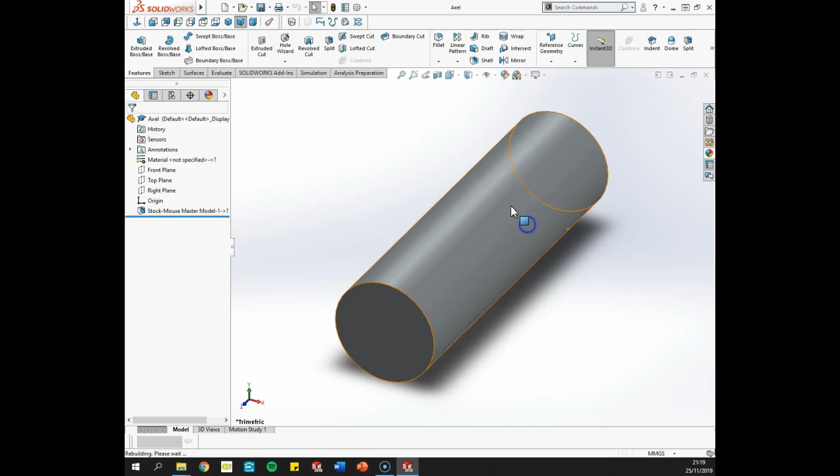Close that, and lastly we'll do the axle, and I'm just going to make this chrome, some sort of metal. Bring that into view there. Metal, chrome. I'm not going to make any changes to that. Right, let's start putting it together. So I'm going to go to a new file. I'm going to go to an assembly.

And I'm going to bring in the base first, and it's important when you do an assembly that the first one that you bring in will usually be the base, or the most important one. It can't move basically, so I'll bring the base in. If you want to reorientate it, you can, I think there's a way of changing the X, Y, and Z. It's not there now. It's not a problem anyway.

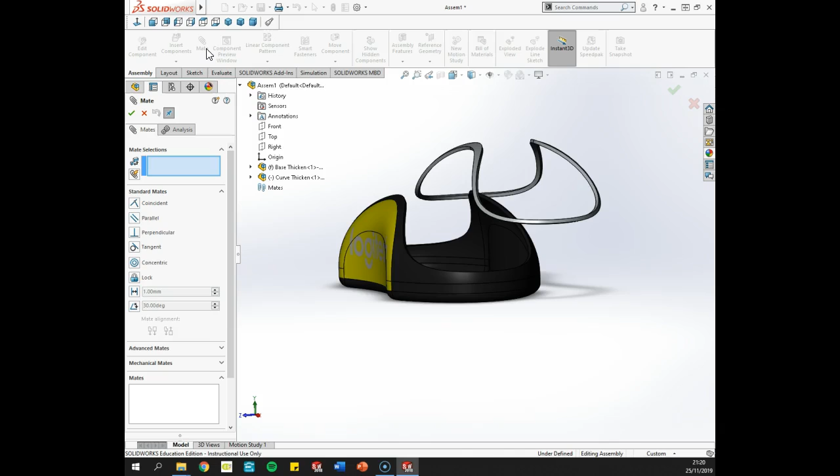Right, let's start bringing in, I'll bring in the curved part, so insert components, browse, we're looking for that curvy part, so curve thicken. Bring it in there. Now, we have to do mates here, okay? Now, the mates that we've done before, for example, the steamroller and stuff like that, they were simple points to points, points to edges, concentric holes with shafts and stuff like that.

This one here, because they're both made in the same master model file, they all have the same planes. They're all based off the same front plane, right plane, and top plane. So if we open this menu up here, we're going to use the planes. So I'm going to open the base thicken, and I'm going to select the front plane, the curve thicken, front plane, and they're coincident, green tick.

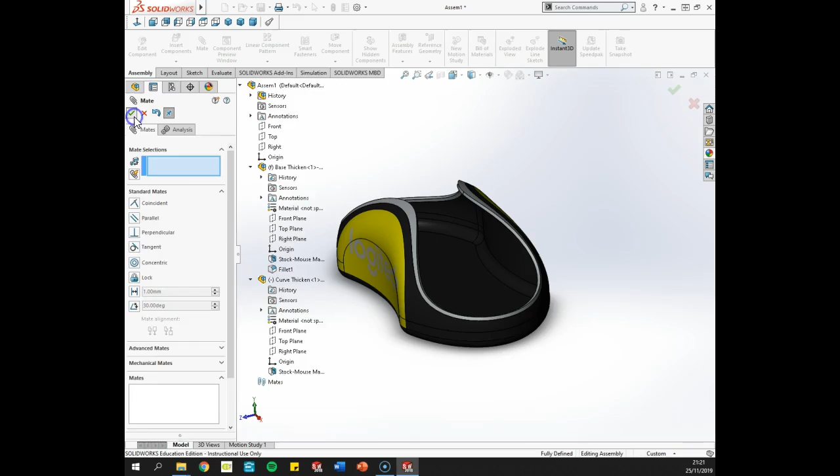Now I'll do top with top, green tick, and right with right, and now it's in position. So we do that every time. Green tick. Insert component. I will bring in the right mouse button now.

Right, so now what we need to do is, in this here, close the curve thicken and leave the base open, but open up the right button. So front with front, top with top. Don't forget to do green tick afterwards, right with right. And that's it in place.

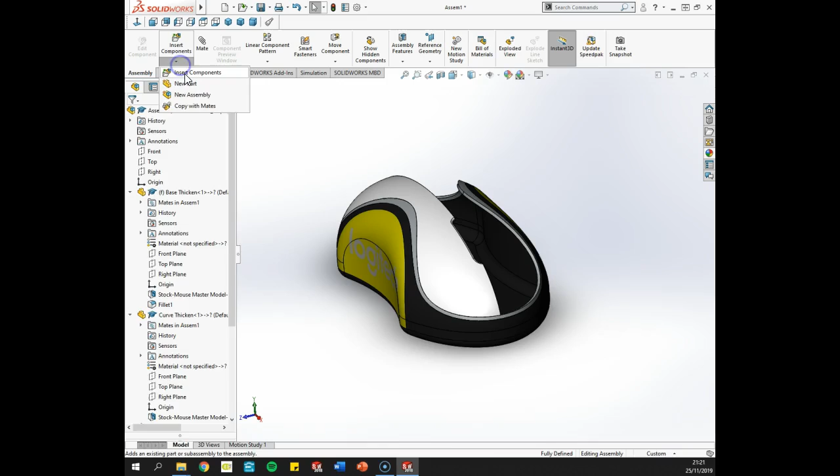I wonder if my color scheme would be okay with a photorealistic image, you'll see. Insert components, we'll go with the left button now. Same again, mate. So I'm going to close right button, open left button, so front with front, top with top, and right with right.

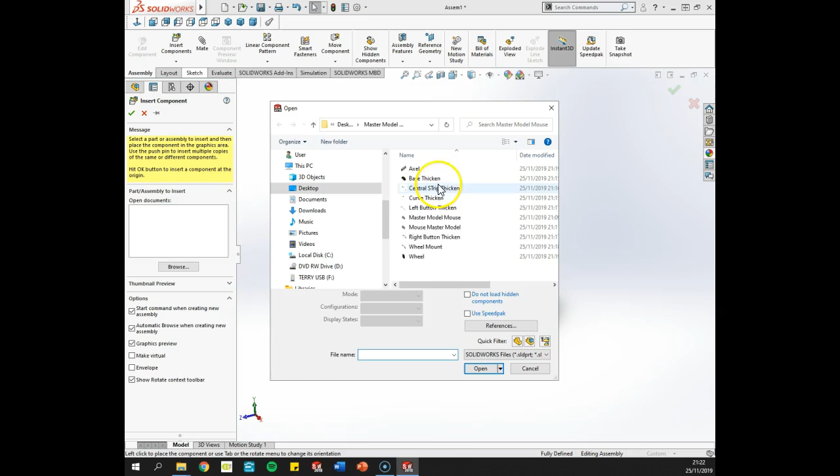Now I'm going to put in the wheel mount. Let's see, wheel mount. I can't see it there. There it is. So it's an easy enough process, a little bit tedious, but get there in the end. Wheel mount, open, front with front, top, right with right. Done. Just want to zoom in and see what that looks like.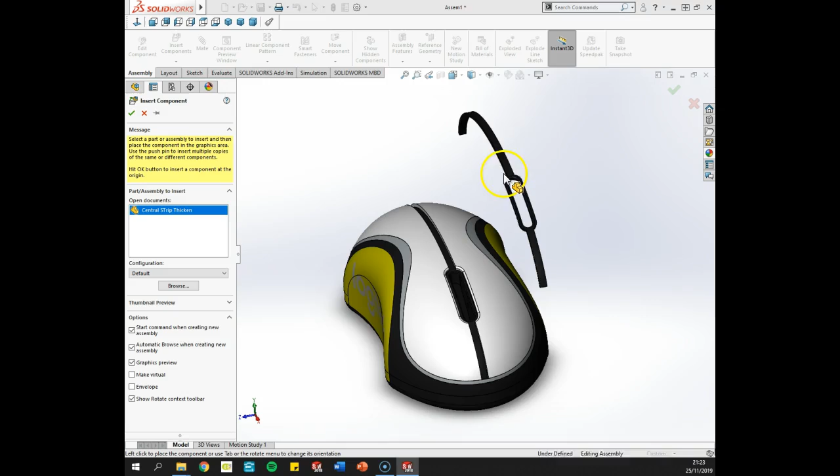Okay, now we need to put our central strip in. Insert components, central strip. Okay, mate. Lastly, oh no, we've still got the wheel to do. Central strip, front with front. No, I've done that wrong. So delete that one. So front, central strip, front with the base thicken, top. Okay, I got them mixed up there. Delete that one. Top with top, and right with right.

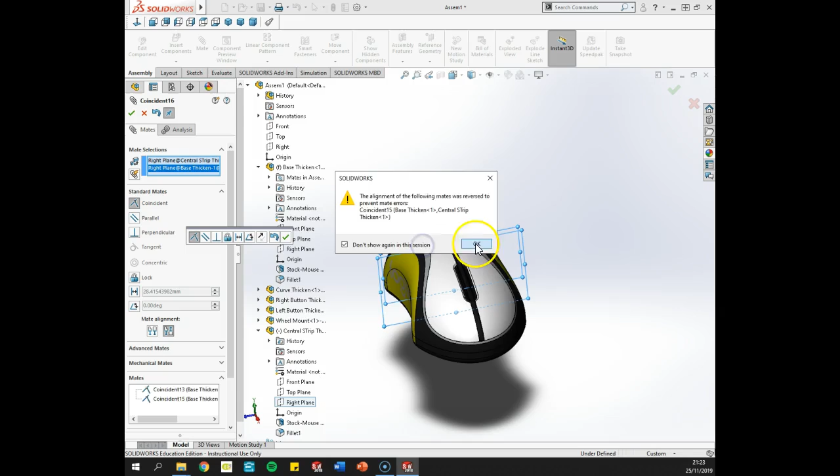Okay, so that didn't work there. Let me flip it there. Don't show this message again. Okay, so I made a mistake there when I was doing it. Let's just go into mates here at the bottom. I should have kept a better eye on that. So let's just see base thicken and central strip. I'm just going to get rid of the last two here. I should have been paying better attention there.

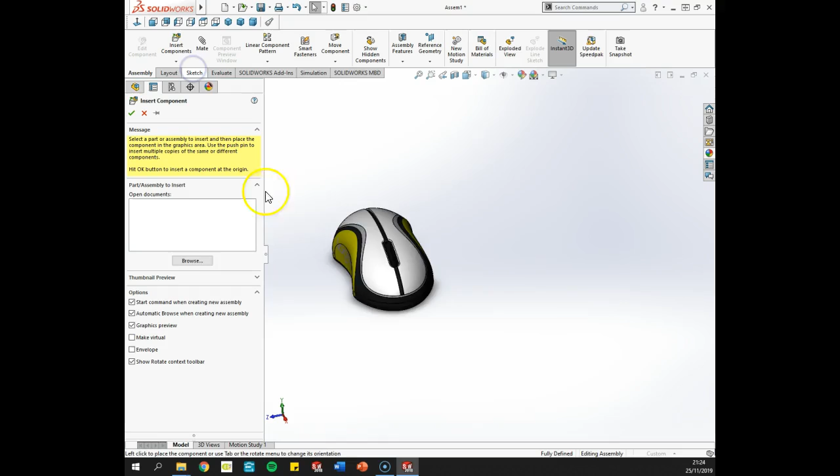Right, so that got flipped somehow. So what I'm going to do there is probably take out the central strip. I'm sure there's a way that we can reorientate it, but I'm just going to be quick about this. Insert component, browse, central strip. Right, let's go again. So base and the central strip, front, top, right. Lovely.

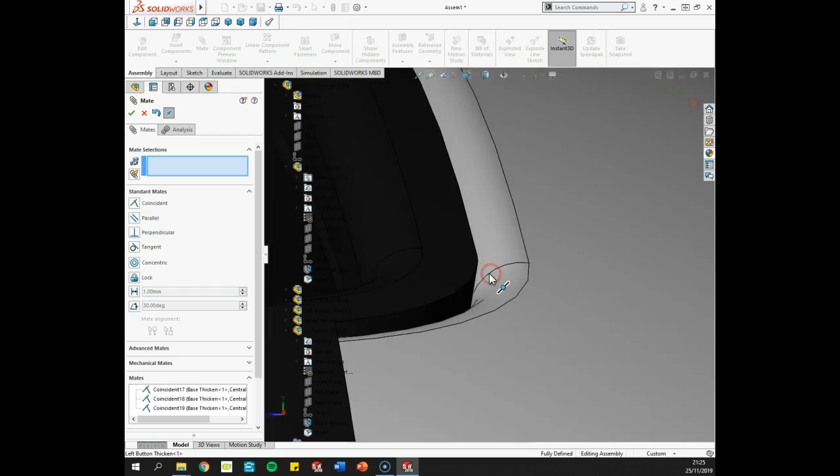Okay, so there's a bit of curvature going on. So what I might go back and do is I might take out this fillet here, so we can always go back later on and fix that. Let's just get the axle in position now. So insert components, our axle. Now I could do the same thing again here, but I'm going to purposely not do this using the planes. So I'm going to try do it the normal way. So mate, so we have the outside of the shaft with the inside center of the hole, and we want to make sure concentric is ticked, which it is.

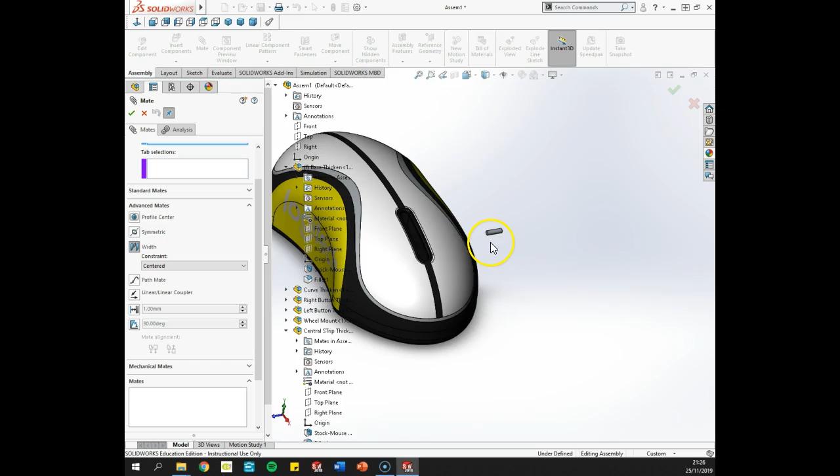Okay, so now it's lost in there somewhere, so I need to be careful. Actually, I can't see it. There it is. It is there. Okay, now the next thing I want to do is a width. It's actually going to be a tough one to do, just so I can see it there. So mate, I want to go down to advanced mates, and there's one called width, and I want that surface and that surface to be equally spaced along. Let's go back to hidden detail.

I wonder if I can do this now. Oh, that's going to be difficult to do. So actually I don't think I even need to do that, so let me try that again. If I just make that circle coincident with that circle, because they're meant to be flush, yeah, that's it there. That's all I need, so I don't think that'll move. No, it's not. Perfect.

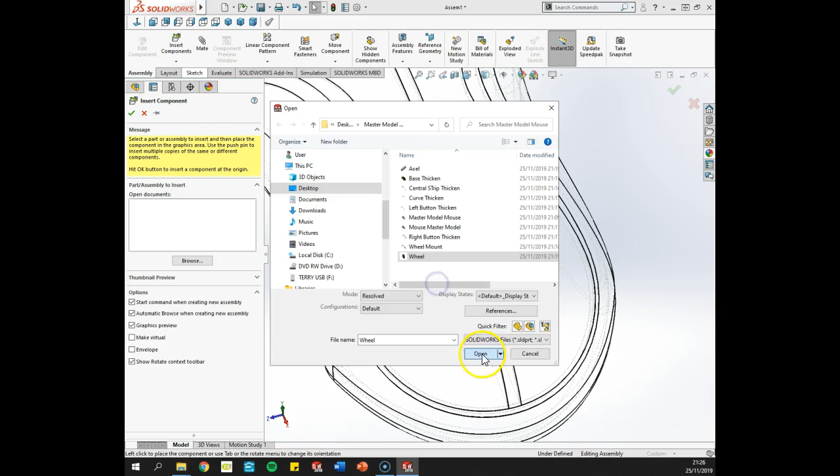Now we'll bring in, lastly, the wheel. Same again, concentric mate. So the outside of that, now I hope that's the same diameter, I think it is, with that one there. Green tick. Now we need to get that centered. So I think I can make that circle, let's just try this, that circle coincident with that circle. And it's actually able to spin there. Yeah, that'll do. That'll do nicely.

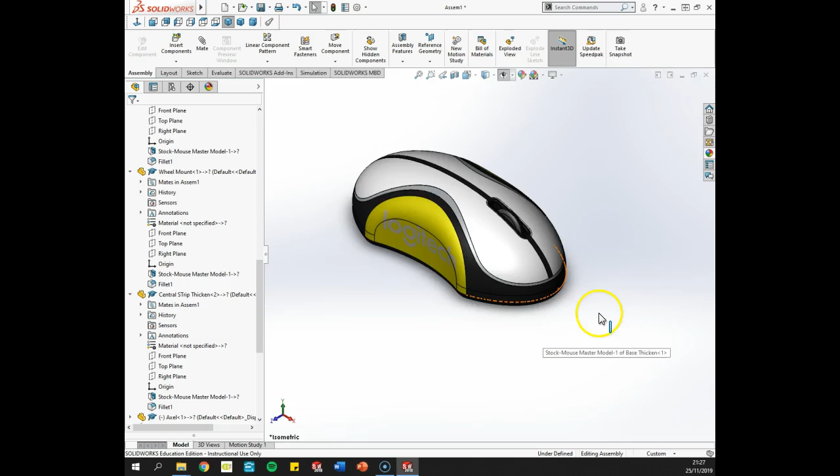Right, go back to my isometric view. That doesn't look half bad. That looks good. I'll probably do a photorealistic image of it. Give it a quick save there. Rebuild and save document. Now I'm going to show you how. Oh yeah, assembly. So mouse assembly. Save it on my master model mouse.

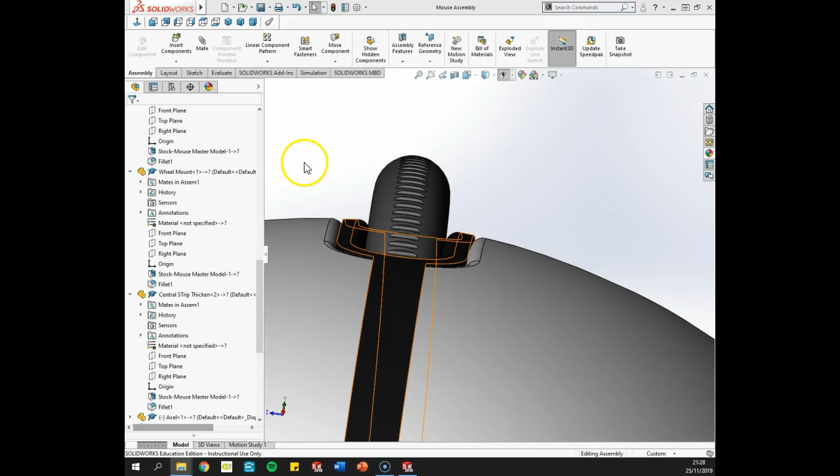Now I'm just going to go back and change. I'm not liking this situation here where the two fillets are kind of clashing. Well, not clashing, but there's a space between them. So I will go back to my left mouse button. Sorry, my right button, and I'm going to delete that fillet.

Okay, and I'm going to save it. I'm going to close it, and it's going to ask me about rebuilding the document. So if it doesn't ask you to rebuild it, click the traffic light up here, and that actually hasn't updated for some reason. Let me just see this again. So left button, fillet, delete, yes, save, close.

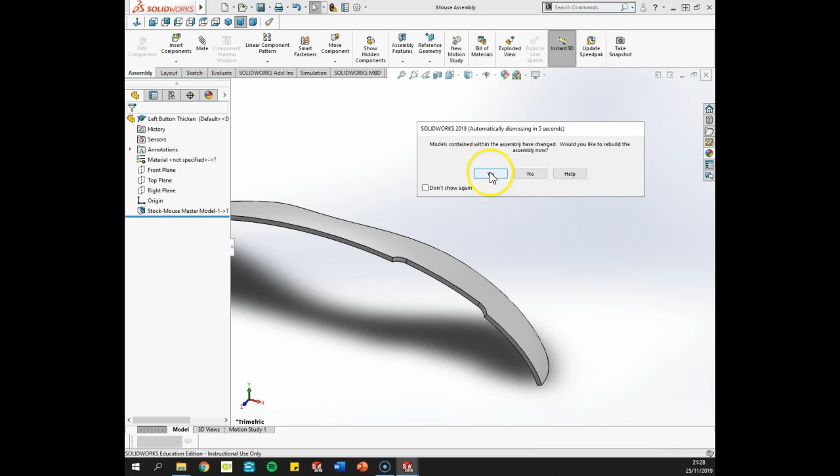Okay, so it's asking me over here, models contained within the assembly have changed. Would you like to rebuild the assembly now? Yes. So it's a live assembly. There we go. You can see it's gone. So I need to do the right mouse button now. I thought I'd done it already, but obviously not.

Didn't save it. So delete my fillet. And give it a save. Close it. Same again. Do you want to update it, basically? Yes, I do. There we are now. You can see it's all kind of flush.

Okay, so that's it. So what I'm going to do now is do a photorealistic image of it to see what it looks like. I'm just going to pause this video and come back to you. Actually, no, I'll go through this anyway, just to be sure. So we go to SolidWorks add-ins just to show you how to do this. PhotoView 360. A new tab will open up called Render Tools.

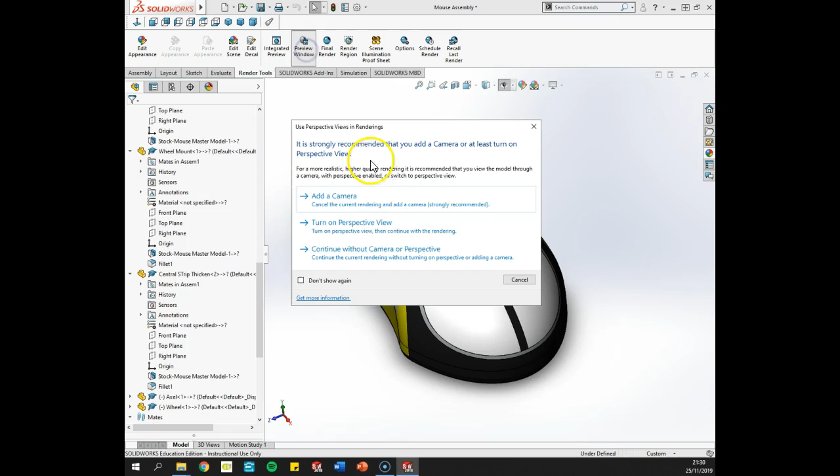Now if we just go to options, I'm going to keep this simple. I don't want to have huge quality here, so we're using a preview render, so I'll just go to maybe better. So it'll just give me an idea of what it looks like in photorealistic terms. Go to preview window, turn perspective on. Turn perspective on just gives it a more realistic view. Now this could take a couple of seconds, so just bear with me for the PhotoView window to open up. We're nearly there.

48 minutes, not bad for a full activity. So I'm not going to do anything until it's done, because it can crash very easily if you start clicking things. Just let it do its thing.

So I'm pretty much happy with the mouse here. Remember, you can go back to any of these parts individually and you can change them, and they will update in the assembly. Just one thing though, your skeleton or your master model, we can't do anything once it's done. We're done with that. I don't think it'll change retrospectively, so anything we do in the future parts won't update back in the master model. But I think if we made any changes in the master model, it updates. I think there's a link, there's a knock-on effect.

So if I went back into the master model and started messing with it, we might actually have a look, see if anything happens here. So something that I could change there that would be drastic. I don't think it matters. No, in fact, I'm not going to do that. So I'm just going to close that. I tend not to go near the master model after it's done.

So let's have a look at our PhotoView 360. It's loaded up there. My computer's struggling there with it. Okay, so it's not too bad. So you can see that the floor isn't in it there, which annoys me. I don't know why it does that. So what I'll do there is just close all these up, make it all tidy. We should always do that.

Give it another save. Now in here, if we go to, I think it's scenes and edit scene, I think we have to just edit that, turn it off, and then turn it on again and go green tick. The floor, yeah, you can see the floor starting to come into it now. It just looks a bit better. I don't know why you have to do that, it's really annoying.

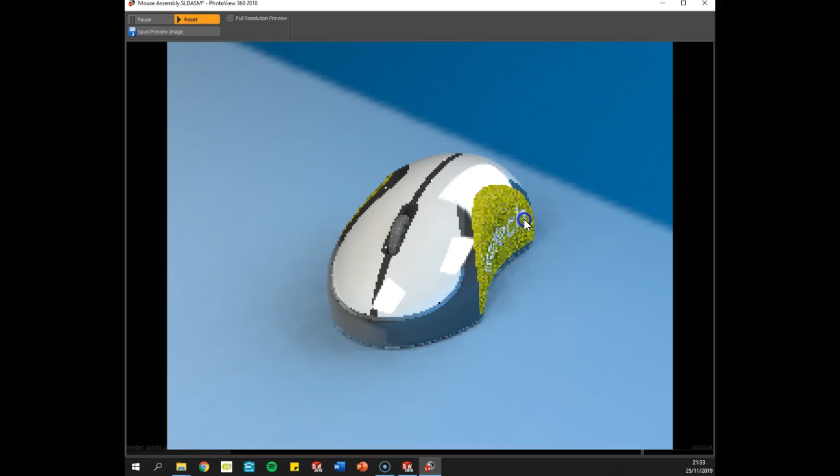Anything that I'd like to do to it there, maybe just rotate it a little bit. Maybe I'll put a little scene on it. Just select something and it updates it automatically. It makes it look like it's sitting on a surface. Now you can see the textured effect there.

That's going to take a bit of time to actually render, so you let it do its thing. So I'm just going to leave it at that. If I want to save an image when I'm happy with it, I'd go save image, save it as a file. We can pop it into our PowerPoint for output 6 later on. So I'm just going to close that, and that's pretty much it.